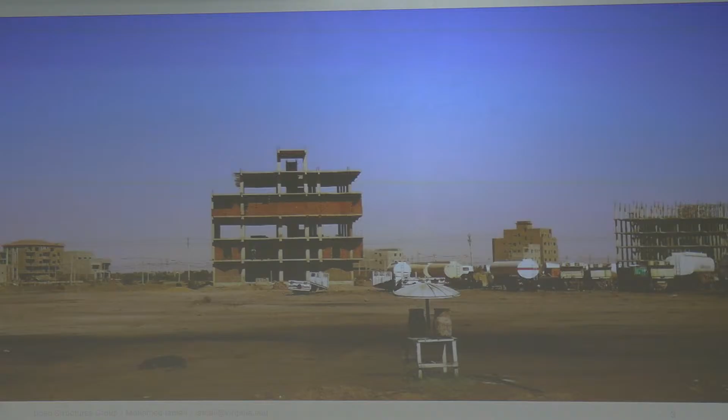And then in the background, you see another common sight, unfinished concrete frame buildings. To me, it always felt a bit like a skeleton of an incomplete dream. These were homes that cost too much for people who were trying to invest in a future, but they couldn't afford it right away. And so they built what they could, and then they waited. And I hope you'll agree that it's not a controversial thing to say that housing should be a human right. And so it always felt a little strange to me to see these unfinished houses just littered around.

And this is not an uncommon sight throughout the global south. If any of you have traveled in Latin America, in South Asia, Southeast Asia, et cetera, you may have seen buildings that looked a lot like this. Most of what I'm going to be presenting today then is motivated by this question: how can we have dignified and accessible construction for the people that need it? How can we have an immediate and profound impact? I want to find ways to translate this rigorous design method that we're developing to issues that affect 99% of the world's population.

A lot of my work started by questioning architecture, and I'm going to use the capital A architecture for all of us and everyone outside of this, and our approach to sustainable development. There's often a really big disconnect between what designers in the global north, places like the United States or Europe, assume designers or construction need in developing countries. We often romanticize indigenous materials, local practices, and we chastise the use of industrial materials like reinforced concrete and steel.

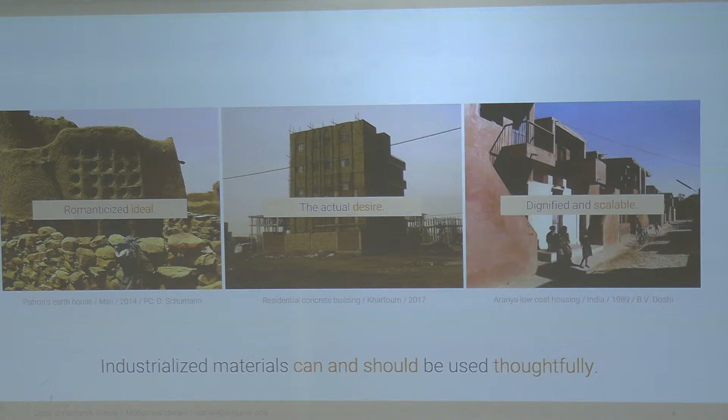But there is clearly a desire for structures that reflect people's desire for a dignified way of living, or something that signifies development, signifies achievement. And to me, that's a big part of why these investments were always made in empty concrete frames. So rather than imposing this romanticized ideal of what low-carbon construction should be in the developing world, I wanted to explore an architecture of dignity that reflected their newer cultural values while still meeting realistic needs for construction.

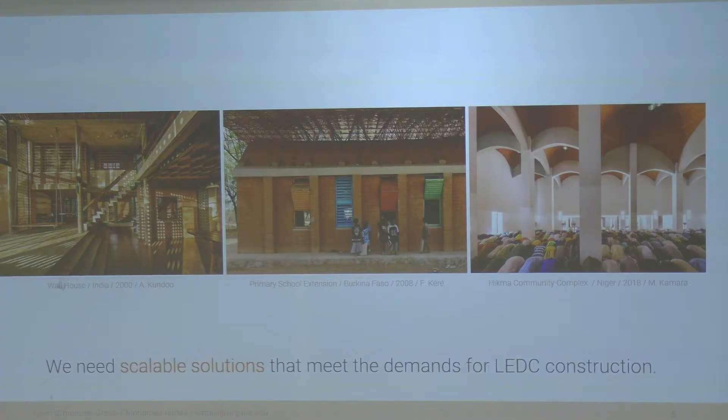I'm not the only person to do this. Some of my favorite designers from developing regions, like Anupama Kundoo, Francis Kéré, Mariam Kamara, have asked these exact same questions for decades. They've combined indigenous materials and practices with industrialized materials, and they've accomplished a whole lot more than we could have a century before. Nonetheless, these are often singular boutique designs. They're really beautiful little architectural gems that you'll see scattered throughout the global south, but they're not necessarily scaling up. They give us a lot to learn from, though, and so I don't want to discount that. But they're unable to meet the needs of so many people around the world, especially when we take in the scale of the challenges for growing populations.

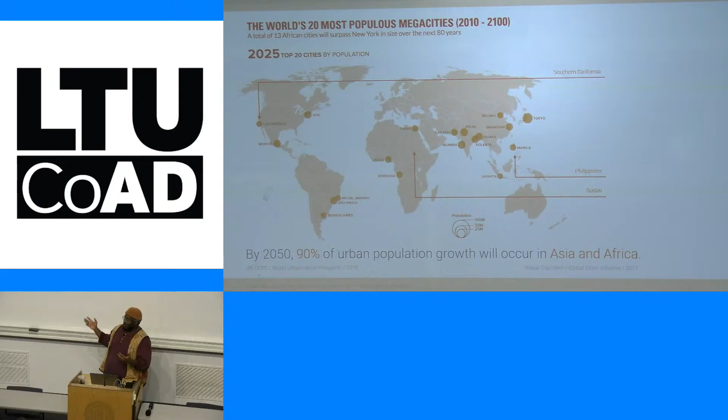And this is both an academic and personal interest of mine. I was born in California, but my family's from Sudan. I was raised in the Philippines. My parents now live in Kenya. All of these places show up on this map at one point or another. So it's not something we could ever really escape from.

So, this is a house. My dad spent 16 years trying to build a house in Khartoum, Sudan. He's an expat. He has, I will say, above average resources for construction, and yet it still took him a decade and a half to build a house for his family. If you don't know, Khartoum, Sudan is currently in the middle of a civil war and has been since the 2019 revolution, roughly.

And so we're not even sure if this house is still standing, but it was a decade and a half of investment to try to build a home for his parents that no longer live. So it's a personal issue because they built a concrete frame building with engineers who didn't quite necessarily know how to work with this material. But he still saw it as a long-term investment that was more secure than the Sudanese dinar.

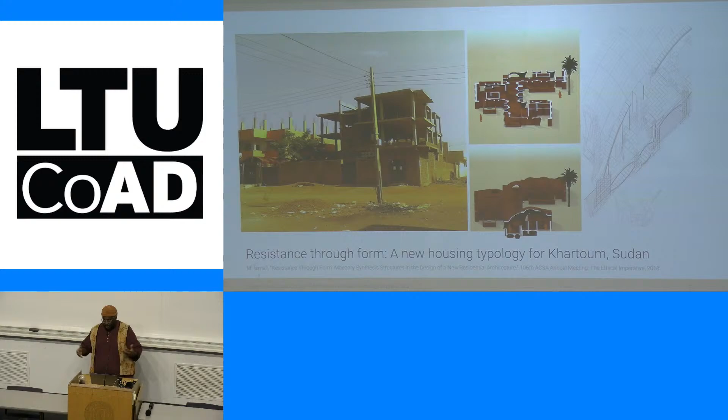So when I was a student, I started trying to figure out how my background in engineering and architecture could combine into some kind of interesting proposal where I could take the local material, not depend so much on imported materials like steel and some of the cementitious materials that were becoming more popular. And so I proposed this vaulted, dynamic system that responded to public and privacy gradients in housing in Sudan.

But if I'm being honest, no one's going to want this. They want the concrete frame building. And so I was still working with this idea that I needed to reinvent the indigenous rather than respond to what was currently desired. This is another photo I took during my research.

And what you might see is a family that has probably been allowed to squat in the property. The reason for this is that they oftentimes were given permission to squat on an unfinished building with the understanding that they'll give their services to protect the building materials. And that, to me, highlights a really interesting issue, especially with our perception of construction practices.

The economics of construction are very different in different regions. That should be obvious, but the point in case is that in a place like the United States, a more economically developed country, labor is the most expensive thing, and so we don't care about wasting material. We care about it from an environmental point of view, but economically we don't. So we will build modular, fast, prefab, wasting materials substantially.

Whereas in a place like Sudan or other less economically developed countries, materials can be more than 80% of construction costs. And so it's incredibly important for them to protect those materials. They guard those for the decade plus that it takes to finish your house. And yet, a lot of the construction looks exactly the same as what we do here.

Flat slabs, prismatic beams, regular column bays, and that's because of a very complicated history of colonization, post-colonization, and building code adoption. Building codes are not developed outside of a context. They are contextual. They depend on who decided to write them. And so they're often inheriting; in Sudan, they inherited the British building code at that time. And so they were building with the same practices there, which assumed that you were building with Portland cement, which is a very specific type of cement based off of England's Portland limestone.

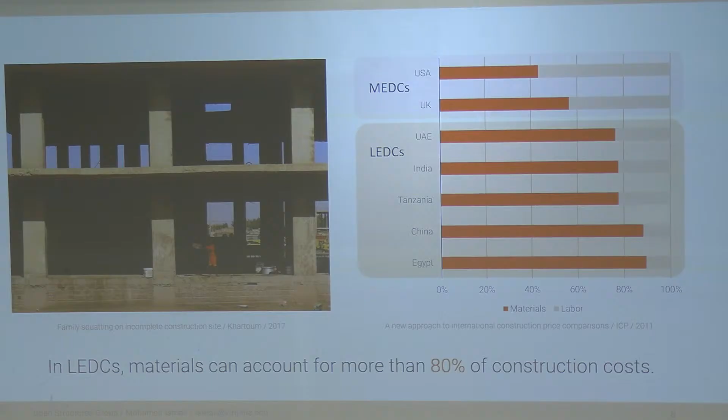So all of this to say, and I could go on and on, but I'm not going to today, it's basically to say all this is inherited practice. And so construction is beyond the means of many people, and to me it never really made a whole lot of sense. I'll also talk a little bit about embodied carbon. I just threw this in really quickly.

Hopefully you all are familiar with the idea of embodied carbon, which is the carbon that's emitted for the materials and the construction, and sometimes the deconstruction, depending on the phases that you're considering in building construction. Right now, on average, 11% of global carbon emissions are just the materials and construction practice. And so it's not the biggest proportion, but the reason it's so important is that it is the immediate emissions that we make.

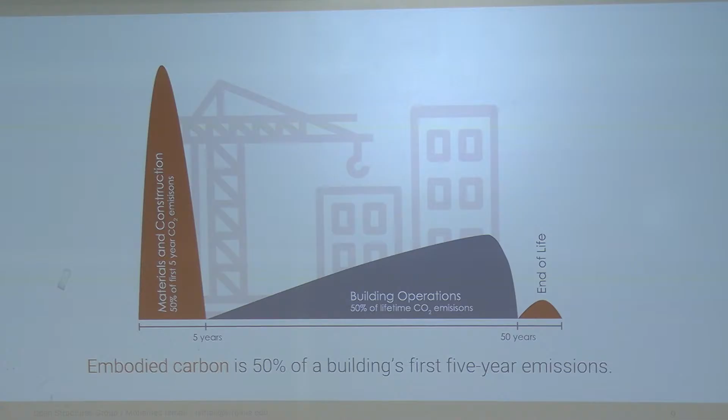So we often talk about lifespan of a building, which might be 50, 60 years if we're lucky. And so we say operation, daylight, lighting, heating, cooling are technically most of our carbon emissions associated with the building. But in the first 5 years of a building going up, 50% of the emissions are most likely just going to be embodied. And so if we're already suffering from a climate crisis, it makes sense for us to focus on the immediate carbon emissions. And so that's where it becomes a big focus.

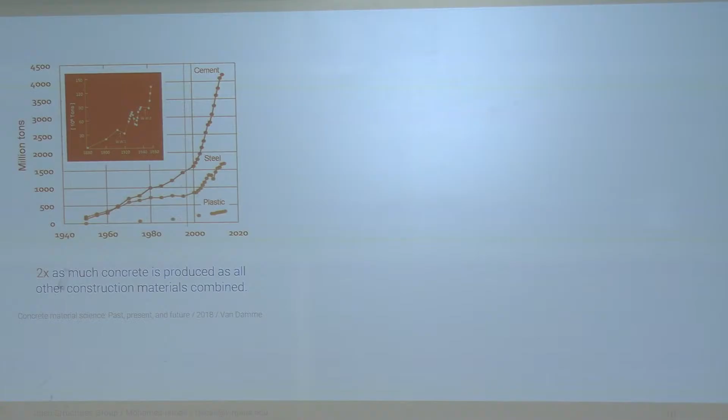Now, I also work a lot in concrete. Concrete has become fairly so a villain in a lot of ways, and I think it's actually more a victim of its own success. Today, if you don't know, 2 times as much concrete is produced as all other industrial construction materials combined. It has far outpaced any other material in the world, and there's a lot of reasons for this. Some of them I highlight here. It's affordable, it's available, it's fire resistant, it's durable, but I think most importantly, it's trusted.

For about 100 years, we have not really changed reinforced concrete construction. It's stayed about the same. If I look at Francois Hennebique's systems from when he first started patenting regular concrete frame buildings, they don't look very different from what we're doing today. And so that might be worth questioning.

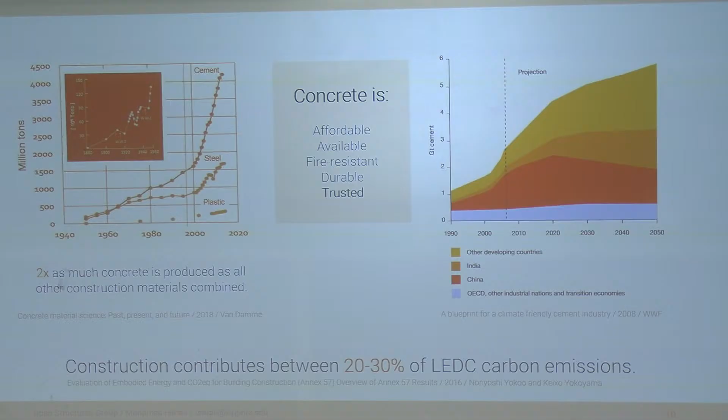Also, this is a projection that by 2050, most of the concrete cement production will outpace that of China. Right now, China is the largest producer and consumer, but places like India, Africa, South America are quickly outpacing China. And so it's expected that the developing world, just in general, will explode due to this urbanization that I talked about earlier on in their use and production of concrete.

So I said 11% of global CO2 emissions are related to building construction and our materials. In less economically developed countries, it's 2 to 3 times that. And so their carbon emissions are much more heavily proportioned towards construction because they're building at a faster rate than us. So it's really important for us to, again, contextualize the numbers and not just say the global average is the global average for everybody. Making sense so far? I'm throwing a lot of numbers, so hopefully I'll bring some photos and images later, but I just want to set the case.

There's also this really interesting misconception that concrete doesn't belong in these regions. These are just a few of my favorite concrete structures in the world. Concrete's played a key role in pre- and post-colonial, less economically developed countries for decades. I think some of the most heroic, creative uses of structural concrete in the world happened outside of the global north or the west.

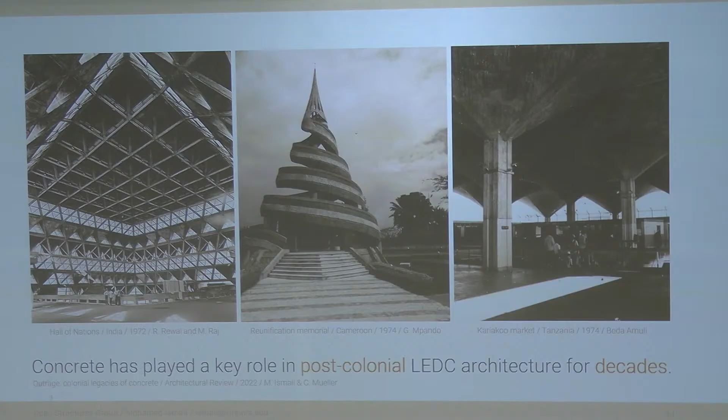This is a reinforced concrete poured-in-place space frame structure that was built in New Delhi, the very first one, the Hall of Nations, by a brilliant engineer, Mahendra Raj, and it's the only one that's ever been done in the world. And the only reason it happened was that labor was so cheap and materials were so expensive that they had to come up with a more creative solution.

Buckminster Fuller visited this project, said that they didn't know what they were doing with the material, and Mahendra Raj laughed at him and said, "We know, you just don't understand our context." He didn't understand that they were carrying buckets of concrete on their head rather than having trucks bring it in. They didn't have factories for steel production. It cost 30% more to import the steel necessary to build a space frame out of steel like Buckminster Fuller would have suggested. So context is everything. And I think there's a lot more to draw from there, but I will move on.

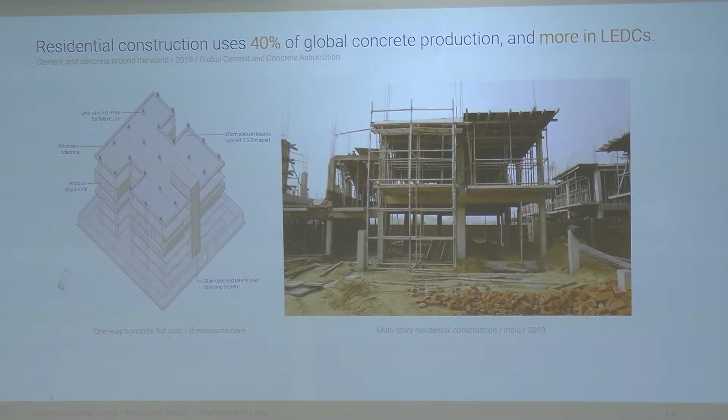Today's construction challenges in my mind lie a lot in what can be done for housing. Residential construction uses about 40% of global concrete production in the world, and it's actually more in LEDCs. It's usually 65 plus. And then when we look specifically at the building system, when we talk about concrete buildings, multi-story concrete frame structures for housing, horizontal spanning systems, which is a fancy phrase for floors and roofs, constitute 50 to 80% of structures, carbon, and mass.

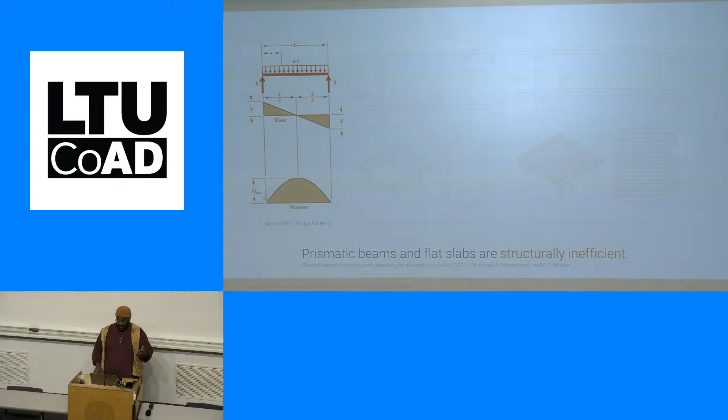Okay, so that was a very long-winded way to explain why I work on concrete floors. I've spent the last 10 years just designing concrete floors, essentially, if you want to whittle it down. But hopefully it makes sense why. Have all of you taken structures at one point or another, or about to, or going to? For those of you that have, I'm really sorry for this slide. This is a beam shear and moment diagram.

I teach structures, so I have to teach this every year, and it's the bane of many students' existences in architecture school. But it's important. Galileo discovered beam theory in like the 1630s. He also wrote about elastic theory. A lot of our structural principles came from some of the earlier Galileo experiments.

And he realized 400 years ago that the stress or the amount of force that every part of a beam is taking is not the same. Yet we design them for the maximum. We always take that maximum moment or that maximum shear, and then we size our structures accordingly. And so if you do this in structures, you'll do the shear and moment diagram for all of your boundary conditions, and then you'll pick that maximum and you'll choose your cross-section size, and you'll say, that's the size I need. But the reality is most of the structure is under-stressed.

And so if we take Galileo's principles and adapt them, we find that we can save some material. We can cut some things off and still be safe and still be within the parameters required for building codes and all of the things that are necessary. We already do this in principle in practice, where we go from flat slabs to CT slabs to waffle slabs like you have in your student center. Those are all variations, but they're still prismatic. They still have the same cross-section all the way across, but they are kind of building off of this idea that the entire structure is not always stressed exactly the same.

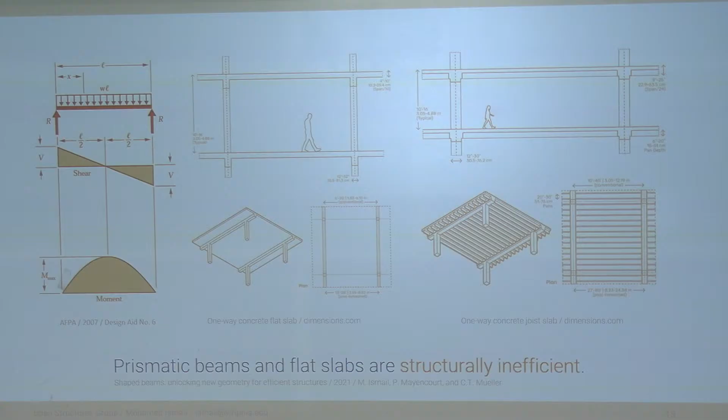And so if we can take that principle a little further, we have this hypothesis. Through geometric complexity, we have more opportunities for material efficiency. And it doesn't necessarily mean I have to go for the most complicated, most efficient structure all the time. This is a really early study we had done where we basically proved there's a gradient of solutions. If I change how complex my structure can get, I can save a little bit more each step. And so if I go from a flat slab to a ribbed slab, there's about a 40% drop off in the mass and embodied energy. And then if I keep going further, I can save up to 70% at some point of just the material consumption of a slab, but it does not have to be the most complicated solution.

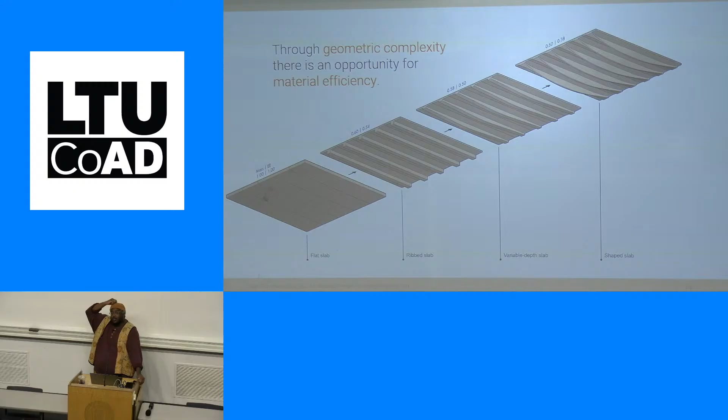And so that turned into this really complicated method of structural optimization where we can take numerical optimization, which is basically you bring in things from computer science where you iteratively improve your solution, you check that solution, and then you keep adjusting until you end up with something that is both safe and efficient. But we don't have tools for all of this. Most architects don't know how to design concrete structures because it's complicated. Even a lot of engineers don't know how to do it. It's a very specialized set.

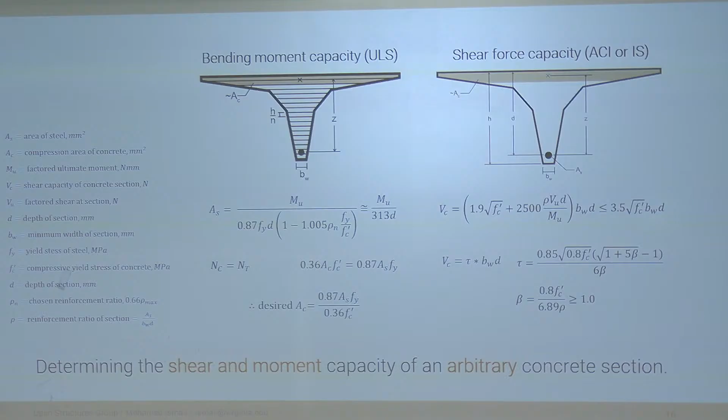And so a lot of my earlier work, especially my doctoral work, was developing tools and methods that most people can hopefully access using just basic mechanics and analysis that a lot of architecture and engineering students would have learned, but may not actually practice in practice. So I just show these formulas to show that I know what I'm talking about. I'm not going to talk about them really. But we determine how much shear, how much bending there is, how much stress there is in each section. We needed to come up with a method where if I just gave you an arbitrary cross-section, could I figure out how much steel there is, where that steel is supposed to be, how much concrete's in compression, and how strong is that entire section? And we need to do that quickly and automatically. And so we brought that in.

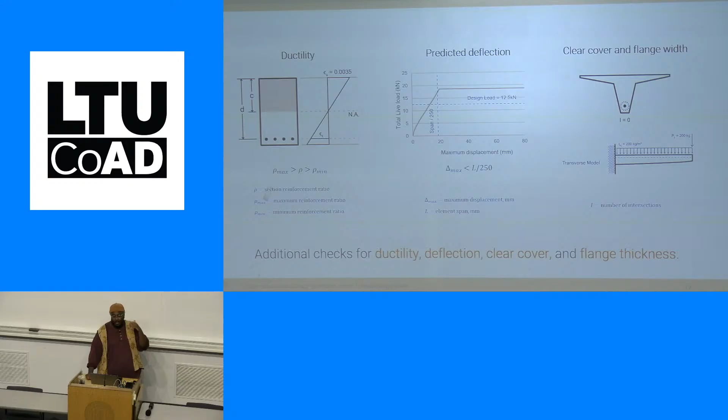Ductility, things like how much steel there is to make sure that the beam doesn't crush before failing, that it has a safe failure. We call it under-reinforced so that the steel is engaged. There's all these principles that are embedded in the sort of philosophy of our building codes, but they don't require us to build an exact rectangular beam all the time. We can accomplish this in any geometry. Deflection. A lot of times people don't realize that engineering is not just designing for structural safety. We also want to make sure that our floors don't bounce so much, or that our wall finishes don't crack, our paint doesn't crack, our paintings don't fall off the wall. And so all of these principles can be embedded in this design method. And so this turns into a constrained optimization problem.

I want to optimize some kind of cost, and that cost could be the cost of materials. It could be the cost of fabrication if we're able to quantify it, the embodied carbon. I have some kind of geometric variable set that controls the shape of an arbitrary geometry, and it's subject to all of the structural and non-structural constraints that I mentioned. And it ends up looking like this. This is a shape slab optimization.

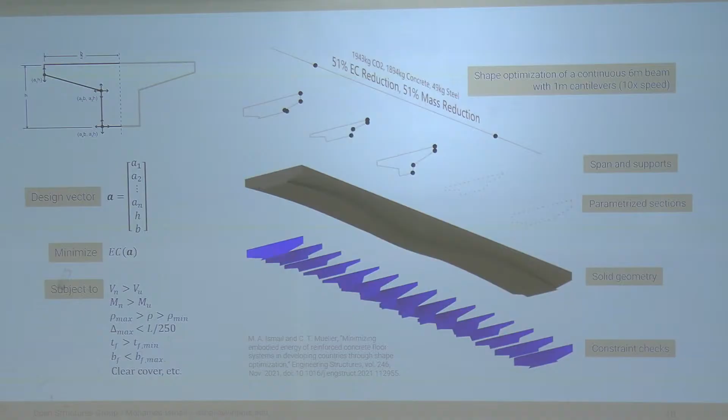It's sped up a little bit, but basically this is what you would see if you were using the tools we developed. We have publications about it. I'm happy to share. The tool is technically open source, but it's very much in beta. And so we're still trying to figure out how to get it in the hands of people, which I'll talk about in a second. But this is the shape optimization for a 6-meter beam. You set up your spans, you set up your variables, and then you let it optimize.

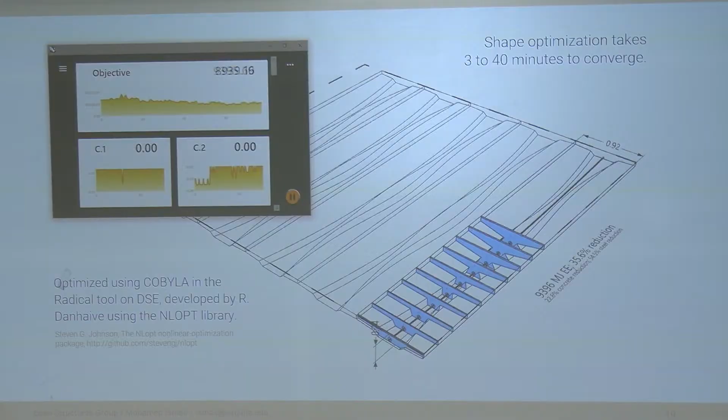And every time a cross-section turns red, that means it's not meeting at least one of the requirements. And until they all turn blue, it's not satisfied. So that's the whole point of constrained optimization. And we can do this for single beams, we can do this for entire structures. This is the tool Radical, which is another plugin that was developed by our research group at the time for constrained optimization in Grasshopper and Rhino. So we wanted to make these tools available to designers who might use CAD and put them in their hands much faster than if you had to require an engineer to be involved.

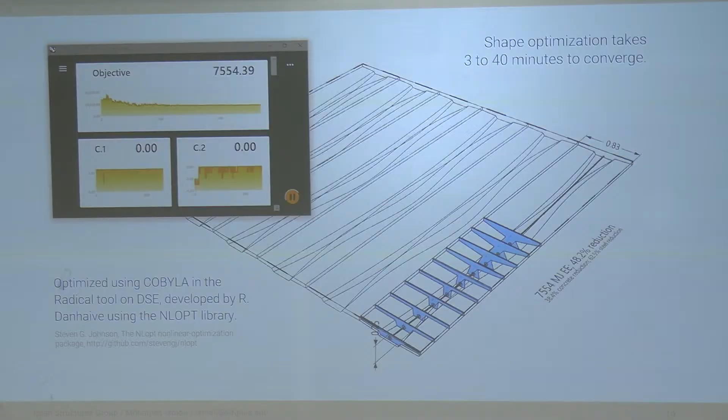This is great. It's strong. It works really well. It gives you solutions that would be really hard. It's basically doing calculations that would take about 10 minutes by hand. You're doing 400 of those every iteration, and then you're doing it 500 times in a row until you end up with the right solution. That's next to impossible for an engineer to do by themselves. An engineer could do this, but it would take months to end up with a design that takes us about 40 minutes. So it's great. It gets us somewhere.

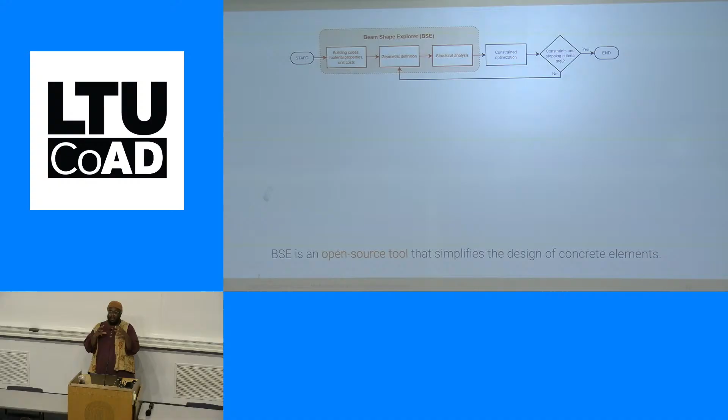And so the hard part is obviously making this available to people. So one of the first things we did is develop an open source tool called Beam Shape Explorer, which essentially captures that complicated part that was missing from that big workflow. And we made some plugins where you can put in the building code that you're working with, the material properties, how strong is your concrete, how strong is your steel, how much does it cost? It does all of the geometric principles, the structural analysis, it puts it all together, and it just kind of fits into tools that already exist for optimization and for structural analysis.

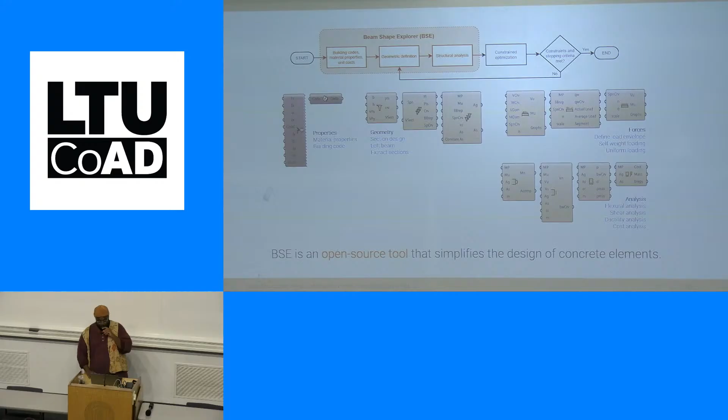So if you've heard of Galapagos, which is a really popular one, or GOAT, these tools already exist. Design Space Exploration is another one that also exists. We're just kind of filling in the hole to get this workflow out there. And we know that this works because we've had colleagues who've used this in their research already. This is some work that was done on robotic 3D printing of self-supporting vault geometries as a formwork for a concrete two-way slab.

And so when you think about it, robotic fabrication kind of frees you up. You can have every single pod of a waffle slab look exactly the same, or you can have every single one of them different. And because of how digital fabrication works, the cost is about the same. And so that frees us up to do some optimization. We can save some material. We can also start to bring in other principles.

I can talk to someone who's an acoustics specialist at Penn State, and he can combine his acoustics with the structural design method. And we've simplified the structure part, so then you can start to bring in other performance metrics that matter. And so this is Jonathan Broyles, who did his PhD on structural acoustic optimization of concrete structures.

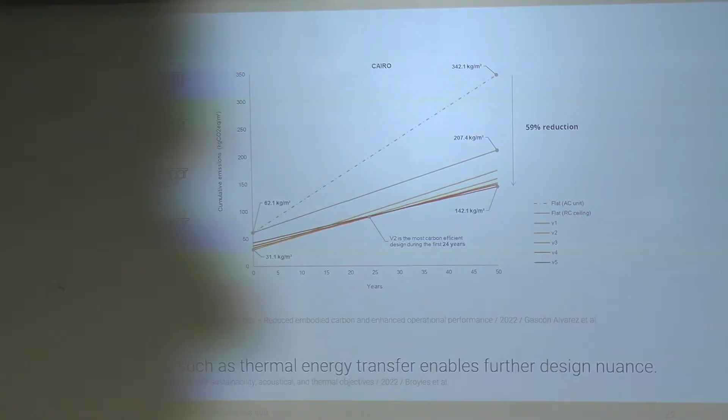Edu Gascon at MIT did his PhD on thermal massing. As you probably know, thermal massing is essentially the storage of heat energy inside of a structure. It can be a really powerful tool for heating and cooling spaces all around the world, therefore reducing our reliance on energy or active systems. The problem is most of us don't understand how thermal mass works. It's a complicated system.

And so Edu has spent his entire PhD trying to figure out how to quantify it and how to actually look at these floor systems as radiators or ways that you can store and heat buildings at different places. And so this is looking at how my initial savings of embodied energy at the very start, or embodied carbon, is that kind of first drop.

But if you were able to quantify this over the 50-year lifespan of a building in Cairo, you could save over 60% of its entire lifespan of carbon emissions. And so that's heating, cooling, and structural. So a lot of different things going on, which is cool because it opens up to a possibility where we're not just designing one structure for every part of a building. We can design it for different programs. We can have more specialized systems if we're kind of projecting this way in the future.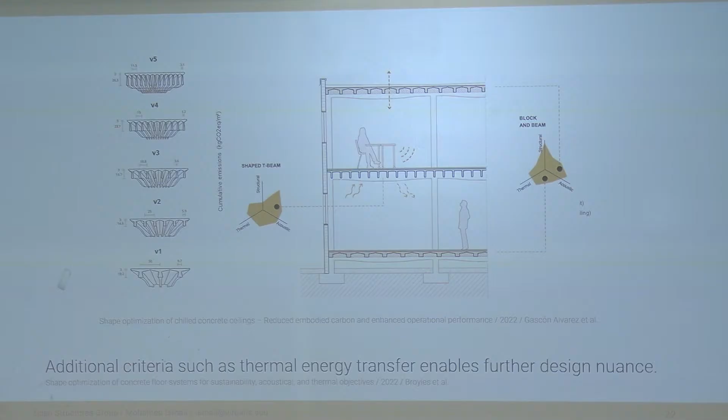Now, I did mention all of this takes 30, 40 minutes, depending on how complicated your problem is. Sometimes it's 5 minutes. That's not realistic if we're trying to design a structure in real time. Most of us are not thinking about our beam designs when we're at the massing scale. But a lot of research has shown that the earlier we think of these solutions, the more potential there is to save carbon later on in the project. And so how do we bring this to the early design stages where I'm still just sketching and trying to figure out where my program goes and where my columns go?

And thankfully, we can borrow a little bit from machine learning and AI. We can use early stage design surrogate modeling, where we just kind of build a set of samples which are based off of general problems. So I could say, I don't necessarily know how much load I have. Load will depend on whether or not this is an office or a library building. And so I can put all that in, feed it into the optimization, generate sample upon sample, map it out, and I get this weird mess of a plot where I don't actually know which solution is best.

This is 2,500 different samples of optimized structures for different live loads, different spans, different depths, different strengths of concrete and steel, all of the variables that I might play with early on. I can't really read this plot. I don't know if you can. I can start to pick out some things, say like the lowest 25% kind of seem to have these characteristics in principle, or the highest 25% does this, but it's still not totally legible.

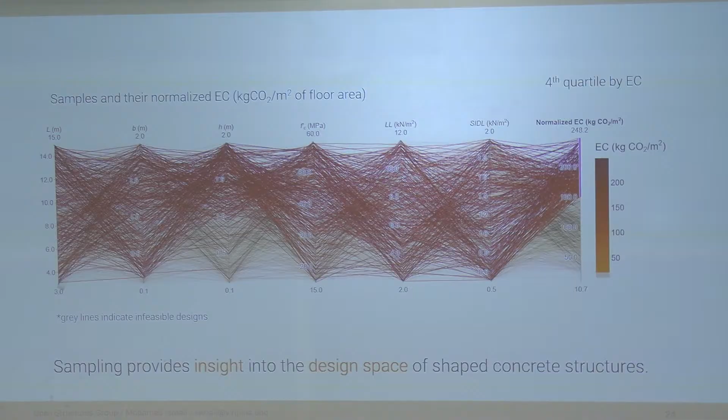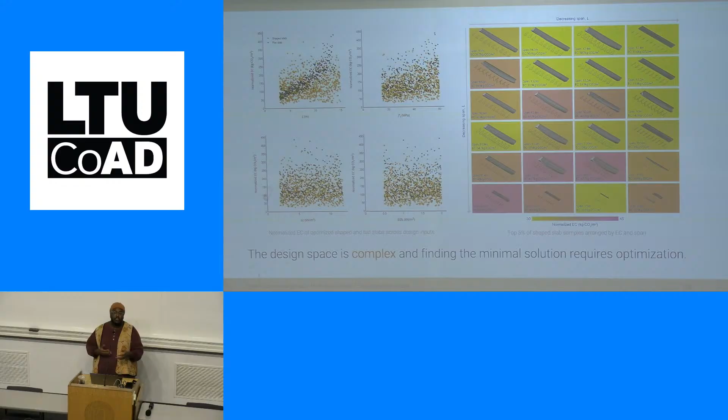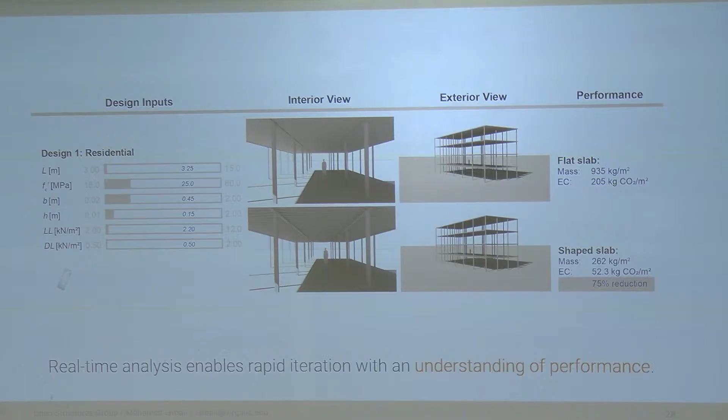So that was a lot of mumbo jumbo about how these numbers kind of come together. Essentially what I'm saying is that in real time, I can play around with some of those number sliders, and I can say, what if this were a house, or what if this were a library? And in real time, it'll tell me how much concrete I'm going to use, how much steel I'm going to use, how much carbon I'm going to be using, what the cost of my materials might be. And I can compare different models. I can do a flat slab versus a shaped slab, and I can show people, as we're just iterating through these designs, how much they might save if they took on this more complicated structural design solution.

And I said real time, so it's worth showing a video of me actually doing this on my little laptop, of using this predictive model. And so this is not running an optimization, it's predicting based off of optimizations. And so I can, with a very generic floor plan, start to figure out how big are my columns going to have to be, or how big are my beams going to be, way earlier than you normally would in the design stages, where you might bring an engineer as a consultant in.

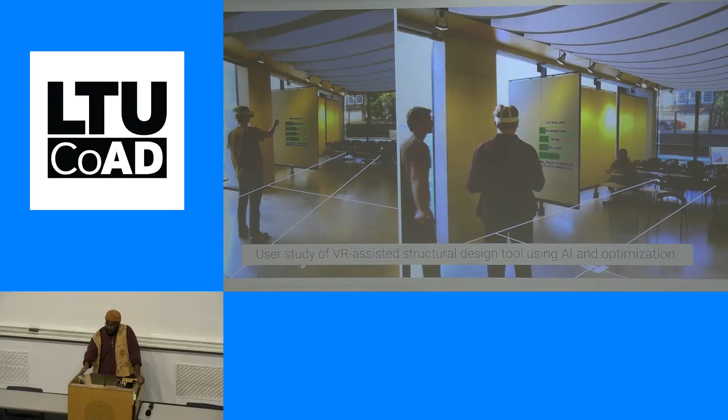To me, what was cool about this is we could start to bring this in with non-experts. So we ran a user study last year with some students using a Meta Quest 3 headset, and they're working with that generic model in a Grasshopper environment using Fologram so that it was projected inside of a part of our building. And so they're seeing the impact of their design choices. They're seeing these shaped structures, and then on that little board, it's telling you how much steel or concrete you might be saving in comparison to the original design.

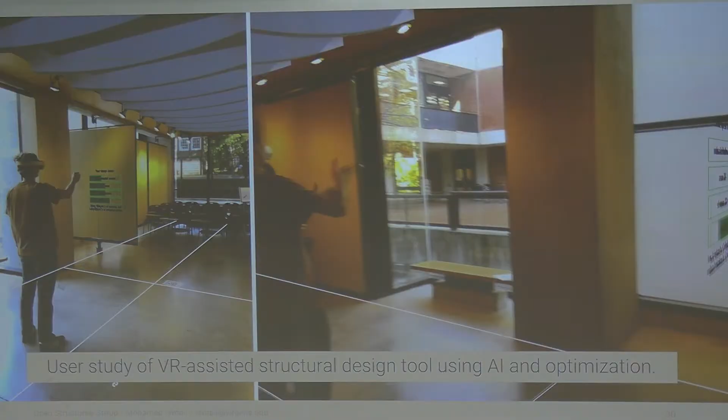And they get to decide, do I care about embodied carbon? Do I care about mass or concrete? Or do I just want to make the coolest, weirdest thing I can? All of that is up to them. Okay, none of this matters if we can't build this. And so a lot of what I'll talk about now is just experiments we've done over a few years to prove that these systems are doable. And we've done this at both small and full-scale prototypes.

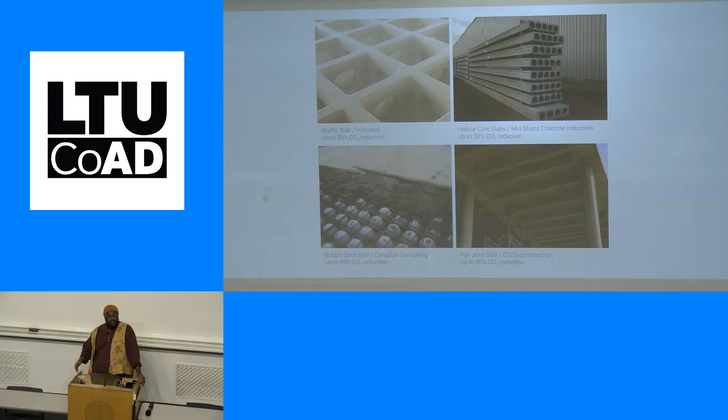And a lot of this is informed by existing practices. So I've already mentioned that we have industrial systems that exist. We have waffle slabs like you have on this campus. We have hollow core slabs. Bubble deck is a newer system. All of these have potential reductions in embodied carbon. The reason these haven't been adopted at the scale that we would want to see for these solutions is that they often require a huge amount of capital investment.

You have to build factories. You have to build the facilities. You need the infrastructure for it. And so a lot of developing countries don't have that already in place. There's investment opportunities and people trying to make this happen, but they haven't quite scaled up the same way. Precast concrete in the United States has existed for decades, but it's still not a majority of our concrete construction. Only about 15% of concrete construction is precast. And so we're under an illusion if we say these are the immediate solutions.

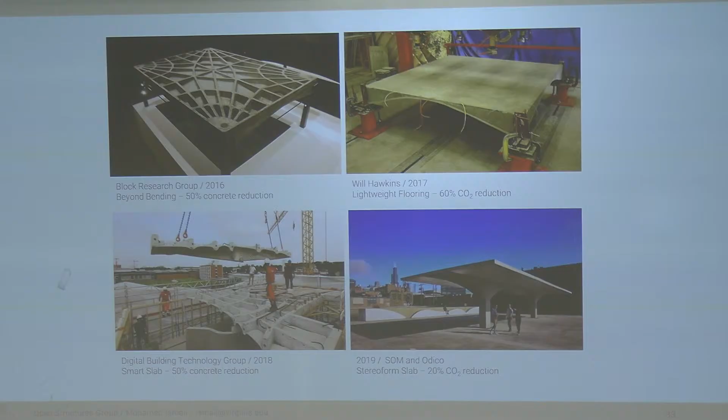In academic research, there's been a lot of really exciting work done by colleagues where they've found ways to use digital fabrication, ultra-high performance concrete, robotic fabrication, to build really creative and inspiring solutions, but they often are requiring fabrication methods and materials that are either not available or not in code or too expensive. Ultra-high performance concrete is about 300 times the cost of regular concrete. And so it is an amazing material, and you could potentially save a lot of material.

Also, 300 times might be wrong. I think that's an outdated number, so don't quote me on that. But it is more expensive than standard concrete. It's becoming more accessible, but it's still not quite there. And so what we've been really interested in are accessible ways of designing and fabricating these things.

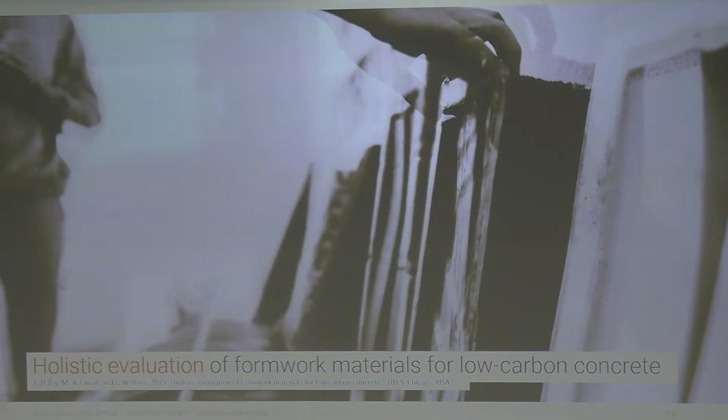A really simple study that we did at UVA last year was trying to just look at the materials that we use in our studios. A lot of students have been advocating for the removal of XPS, extruded polystyrene foam, because it can off-gas carcinogens when you're cutting it on a wire cutter. Certain students have been worried about the material just being in their studios in general. And one of the issues that frequently comes up is that we don't really have a great alternative for casting. We don't have a great material that we can cut, that's cheap, that's accessible, that we can cast whatever we want, our massing model, our final model, whatever, out of it.

And so this was a great chance to bring in some of the research we had already been doing and just say, okay, what are some of the materials that are available or materials that we're interested in? What are things that we assume are going to be low cost, low carbon in comparison to XPS, and let's actually test them and quantify some of these assumptions. And so we started this by just mapping out where our materials came from.

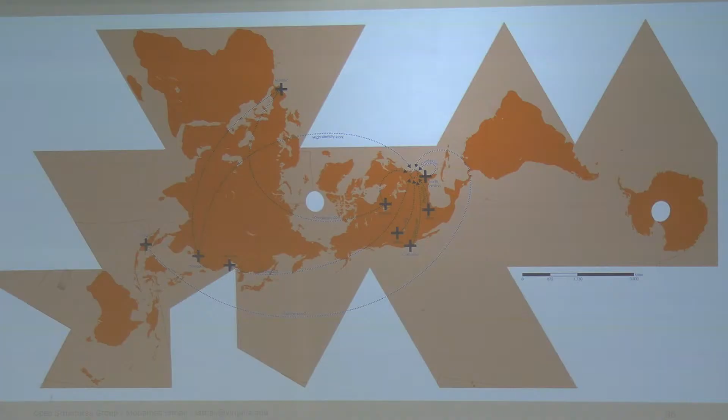Turns out our extruded polystyrene, a lot of it's actually coming from inside the United States. Almost every other material we're considering comes from around the world. And so they might be low carbon from a material sense, but their transportation is actually a huge issue. Doesn't mean that they're not equal, it's just worth considering where they come from and being honest about that reality. And so we looked at materials like cardboard, cork, reeds, which often are imported from places like Indonesia, bamboo, which we actually found in Charlottesville at a local Japanese garden.

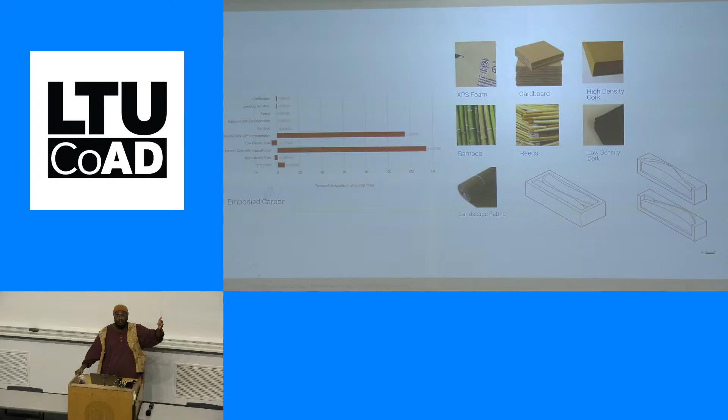Landscaping fabric is another way that you can build complicated forms, and we started to actually quantify what is our embodied carbon. So you'll see that certain low density, it's really small, I apologize, cork, technically, you can argue that it's a negative embodied carbon material because it's a natural material that draws carbon from the environment. But because most of the cork is produced in Portugal and then processed in either China or Canada and then brought to us, there's a huge carbon footprint that comes with it. This small bar at the bottom is XPS. That's the original polystyrene foam that we're dealing with.

Then we look at the cost of the material. How much does it actually cost to use it? Cork, which was the one that my students were most excited to experiment with, was the most expensive one. It's a beautiful material. It actually gave us a great finish. Things like cardboard, landscape fabric, which were super cheap, low carbon, tended to be really hard to work with. So this is labor in hours, just how much time our students were working with these materials.

And so the whole point of this, the conclusion of it basically was that there is never a clear argument between which material you should choose for whatever. It's the same thing between mass timber and concrete. If you don't have the supplies of mass timber, then concrete makes sense, and vice versa. And so it's important for us to be honest about these reflections.

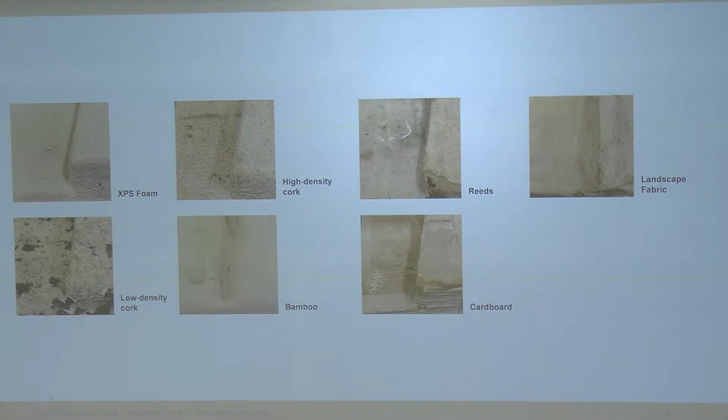And so we presented this work at the school to just kind of showcase what can be done with what is readily available here, things that you might order from Amazon or Walmart or get down the street at the local art store. And we tried to just give an honest reflection of what's done. We also documented and published some findings on this over the summer on the finishes that you might end up with and what tools you might use. Are you using a CNC router or using a laser cutter? All of that factored into how accessible these were.

Then on top of the smaller scale, lab scale work we've been doing, we've been lucky to work with a lot of really great partners around the world for full scale fabrication. So this was a 5-meter prototype, so about 15 feet, that we did in New Delhi in India a couple years back. And we designed a system that met India's code and used 50% less material, but ultimately it was built using all the exact same concrete and steel that is available to builders there.

And this was a great humbling moment where I was asked to challenge my assumptions. I thought that I could get foam for an initial prototype at the scale that we wanted. Due to land pollution issues in New Delhi, we could not find foam. Nobody can sell foam at the scale that we needed. And so that meant that we couldn't use a CNC router to route this complicated 3-dimensional structure with 2-way curvature. That would be really hard to build by hand.

So our local partners offered to do it out of 3-inch steel blocks and basically mill the steel blocks until we got the shape we wanted, which is insane if you think about it. I mean, it was great because they wanted to make our dreams come true, but that was not the right way to do it. And so we just had a conversation with them and we found out that they had 20 years of experience working with plate steel.

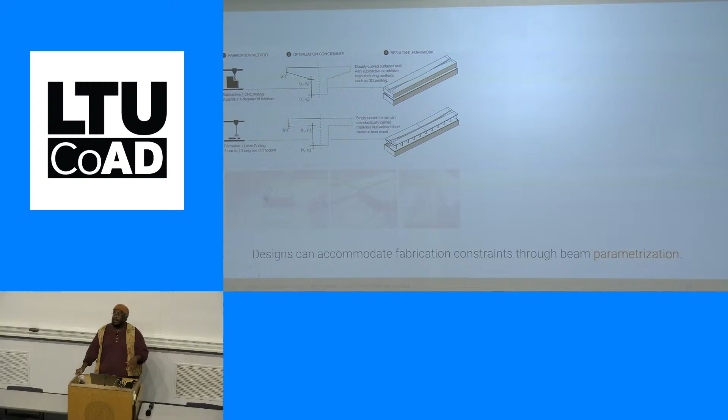Plate steel for formwork is a really common material for especially affordable construction because you can use it up to 200 times plus if you oil it and take good care of it. And so it's an expensive initial thing, but if you have the skill and labor for it, they can build a formwork like this. It was a formwork that kind of came apart in 4 pieces. We did not tell them how to design the formwork, they did it themselves.

And I forgot to mention that the partners we were working with was a local nonprofit that specifically works on affordable housing in rural areas of India. And so they had a lot of practice working with what they called small and medium scale enterprises. Unlike in the US where we might have big precast companies that can transport things 100 miles, in India you're usually working with a family that's in a close neighborhood and they sell the block product to people in that area.

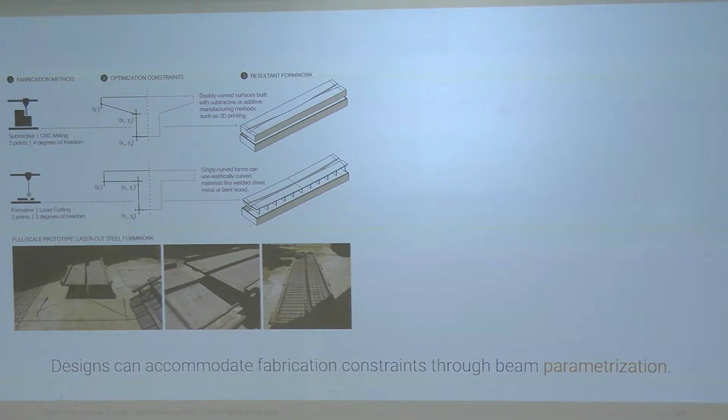So anytime someone wants to build a house or an extension or another room, they're buying it from their neighbor and building. And so they had skill and knowledge at working at that scale. And they believed that this was the right way to do it.

We also got to test it at the National Cement Lab in New Delhi, or Faridabad, right outside of New Delhi, and proved to the engineers who were very skeptical when they saw the structure that it met the code requirements. It wasn't too flexible, and it was strong enough to meet all the requirements for residential loading.

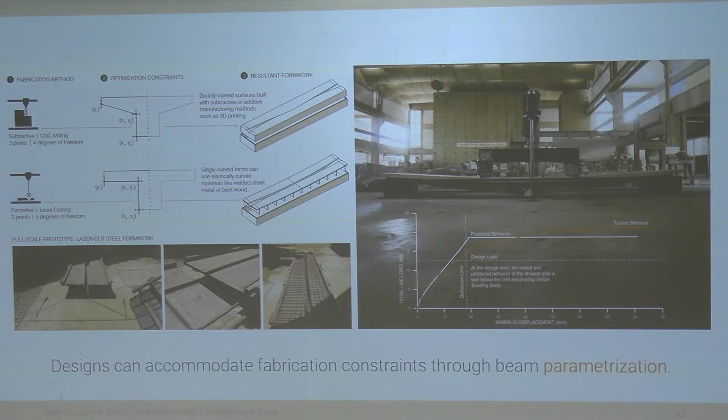So the white line is the predicted load that we had done on our computer through analysis, and then the orange is their actual behavior. And so we often end up doing structural testing because until you actually test this in front of people, people are not totally convinced that it works.

This turned into another collaboration with some amazing professors and students at the University of Arkansas. We built another prototype in Arkansas. One of the things we found in India was that even though you can design and build the coolest 3-dimensional form, the actual translation to fabrication is always the issue.

There's a sort of misconception that digital fabrication is a high-tech thing that's inaccessible to most of the people in the world. The fact of the matter is if I look hard enough in New Delhi, I will find somebody with a 3D printer. I will find somebody with a robot arm or a plasma cutter. But we still have to figure out how to translate the design from 3D to 2D pieces.

And so this was a really great excuse to work with some partners of mine, Edmund Harris and Emily Baker at Arkansas. One was a math professor and one was an architecture professor, and they had already been developing something they called ZipForm, which is a way to mathematically translate 3-dimensional curved surfaces into 2-dimensional flat objects. This was a specialty of Edmund, and Emily does a lot of fabrication.

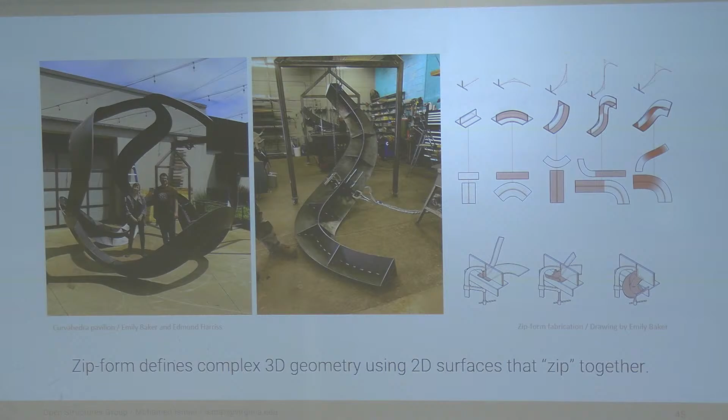And what was cool about this was that it just required a very simple jig that Emily had constructed with students who had never worked with metal before. Whoops. Let's see if this works.

Yeah, okay. So the jig is basically pressing these 2 flat pieces of steel together, and then you're just spot welding as you go. So it's a really fast fabrication method. And what's cool about it is that it removes all the guesswork.

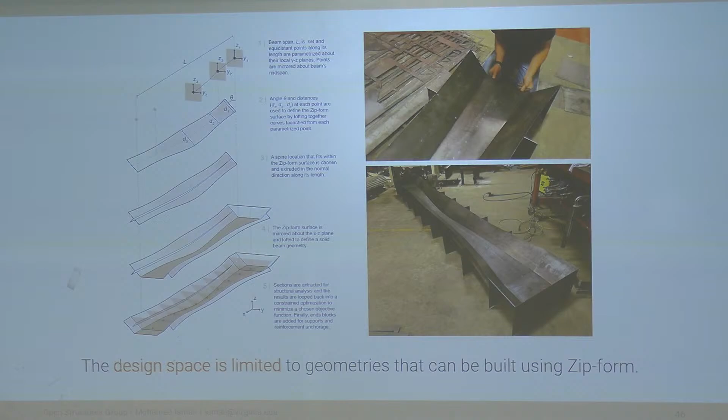So if we could bring the design method of ZipForm and put it into our constrained optimization method that I talked about earlier on, you basically end up with formwork that can just fit together like a bunch of puzzle pieces. And so it was relatively easy to assemble the whole thing. And so we ended up with a formwork that was more reliable.

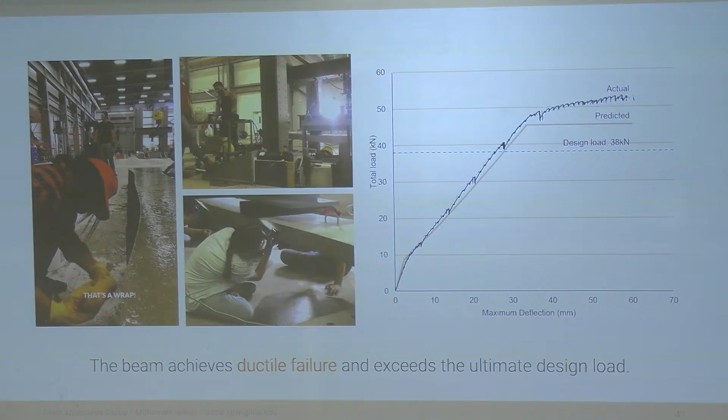Does that make sense? All right, cool. Just checking that you're all awake still.

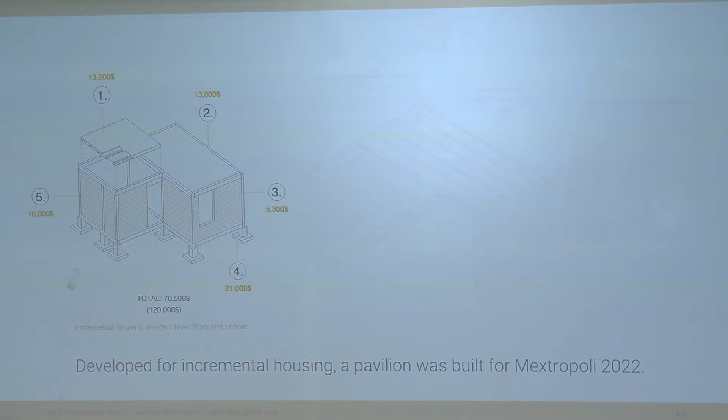Okay, this is one of my favorite prototypes in Mexico City in 2022. We got to build an actual almost room scale example of a shape optimized structure, again, saving 50% of the mass. And this was cool because it started as a conversation during the pandemic with these affordable housing builders in Mexico City who were using something called incremental housing, which is a long-standing policy.

It's basically the cheapest way to give housing to as many people as possible, where you build just the core unit, which is usually kitchen, bathroom, 1 bedroom, and then you provide it to the family, and you kind of guide their construction in the future if they're able to afford it. And so we took the most expensive part, which, as I mentioned before, was the floor system.

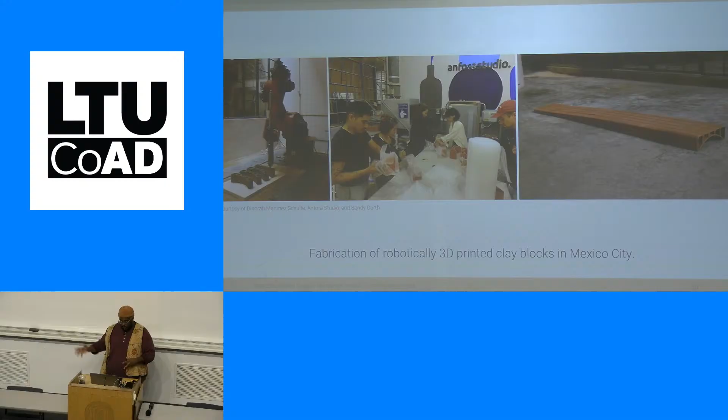So if you had a 3-floor building, that might be the most expensive portion, and we showed that you could optimize this system. And this was a good example of what I was talking about. We originally didn't plan on 3D printing clay for this, but we happened to find a great collaborator who had already opened a 3D printing studio in Mexico City and wanted to try this out.

And so what that meant was that original argument that the more complexity we have access to, the more we can save. We were able to prove that if you had a 3D printing arm, you could shape every single block completely differently for the same cost as designing all of them exactly the same. And so we ended up with this sort of tapering solution, but the widths of the beam stay the same.

And I forgot to mention, block and beam is a long-standing system that's been used since about the 80s in Mexico. It exists in other countries. And the reason it's really popular is it's a great way to build larger structures with very small pieces. And so you have these prefab segmented little beams that you can buy at a local shop, and then you have the blocks that span between them.

The blocks are just there to hold the weight of the concrete while it's curing, and then once the concrete cures, those blocks are essentially lost formwork. So they aren't necessary for anything after they're done. But it's a long-standing tradition, so people are very familiar with how block and beam systems look.

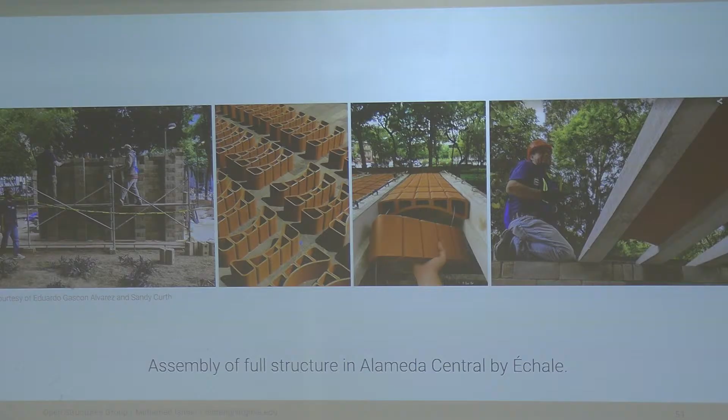And so we got to build a prototype in the middle of Alameda Central. Échale was our local contractors who had a lot of experience building this. And we didn't actually get to structurally load test this the way we wanted to, but a couple thousand people visited it. This young lady did some lateral testing for us. It did technically survive 2 earthquakes, but the epicenter was far away enough that I don't brag about that. But they were like magnitude 5 and 6 earthquakes.

And so it was cool to be able to brag that our structure, which was not actually finished, we didn't glue anything down, there was no foundation, but we did design it so that there was no overturning moment. There were all these things that we put in place that I'm really grateful that we did, because it could have fallen during that week that it was up. And it garnered interest from people who saw the system as something that resembled their housing. It was just a slightly different version. It didn't look too alien.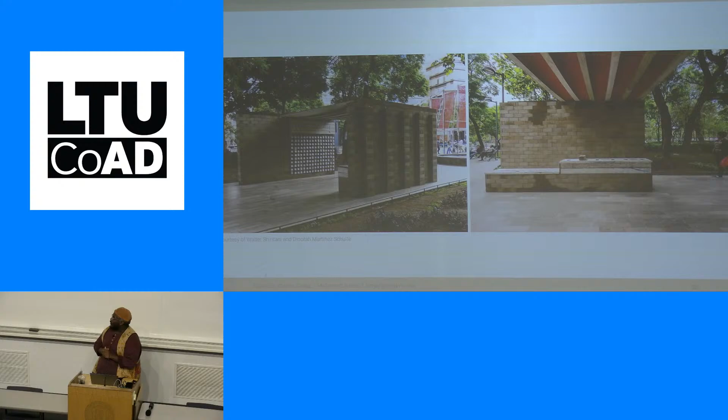So we had post-tension walls and calculated the overturning moment. So what you see inside there is a little exhibition piece where people could come and put little postcards for their dreams of the future of housing in Mexico City, or the future of Mexico City. And so it was part of a larger collaborative effort, but it was great to see it in person.

Now we're working on a similar prototype in Nairobi, Kenya. Nairobi is one of the fastest growing cities in the world. It's growing at a rate of about 22 people per hour, which is a little hard to think about. Nonetheless, it's facing a housing deficit of over 2 million units. Over 70% of their population live in informal settlements, in massive informal settlements like this. It doesn't mean that they don't have housing, it just means that they don't own their land, they don't have the infrastructure, so they often are self-organizing.

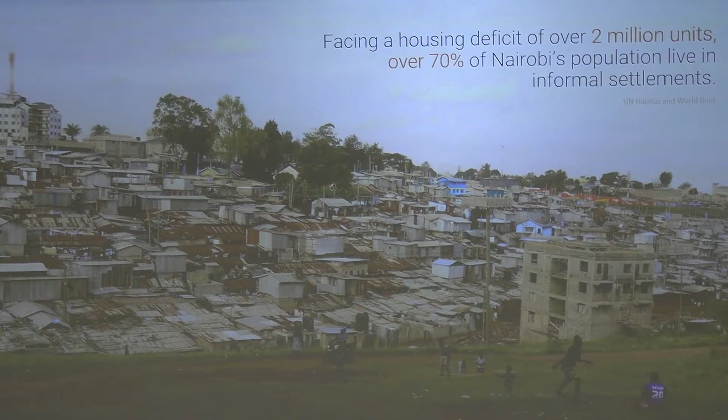Kenya is also one of the more aggressive countries in terms of climate policy. I hope you'll agree when I say that Kenya is not responsible for most of the climate change, but they're already suffering a 3 to 5% loss in their annual GDP just due to droughts, due to flooding, climate migration. They're having a huge amount of issues, so they're being more aggressive about this. They're being more forward-thinking than certain countries like ours.

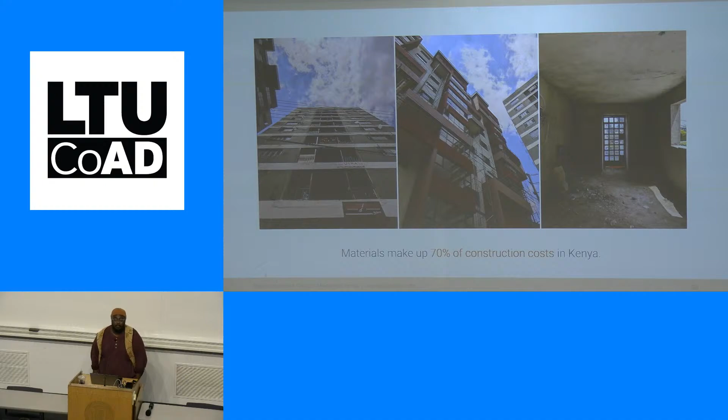And so just like a lot of the other countries I've worked in, materials make up about 70% of construction costs. And so developers have actually reached out to us and asked how we could use some of our research to work there. So we're hoping soon to build a prototype yoga pavilion with this locally owned family business that actually does regular yoga classes in the middle of this beautiful forest in Nairobi. And we want to use it as a way to show that one system, namely the zip form system, can be used to design formwork for many different types of beams.

And so it'll be a simply supported beam, a cantilever beam, a double cantilever, just showing that different boundary conditions can be built using the same formwork system. And we're doing this with a local steel fabricator named Framework, who already have a lot of experience working on modular construction and modular formwork.

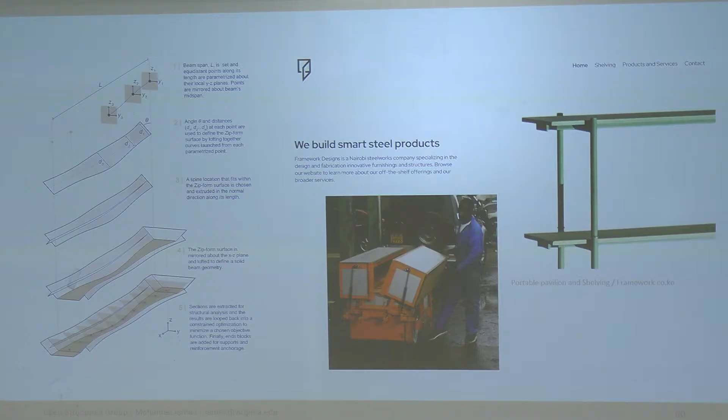This was a video they sent me about 2 weeks ago of their first prototype of a beam that I just sent them a Rhino file, and they were able to make the zip form themselves pretty much without instruction, which was great to see. And so hopefully in the future we'll build this.

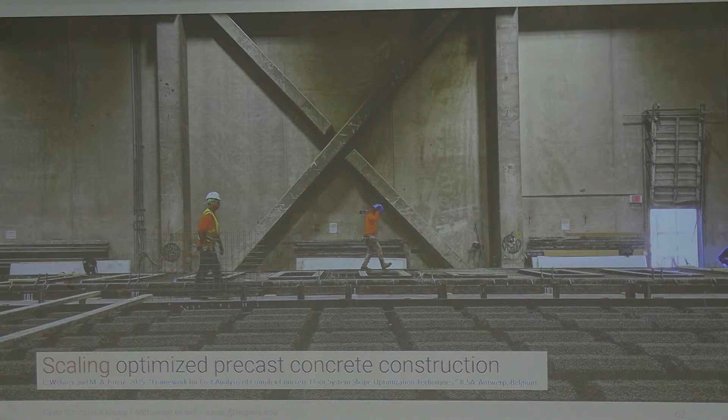We've also been in discussion with precast concrete construction companies in the US to work through the obstacles to adoption. As I already mentioned, the economics are different for construction. And so a lot of times people see these systems in the US and they say, that's great, but we don't have time or capacity to do anything that would slow down production on precast, which already has incredibly slim margins and is already struggling to keep business the way it is.

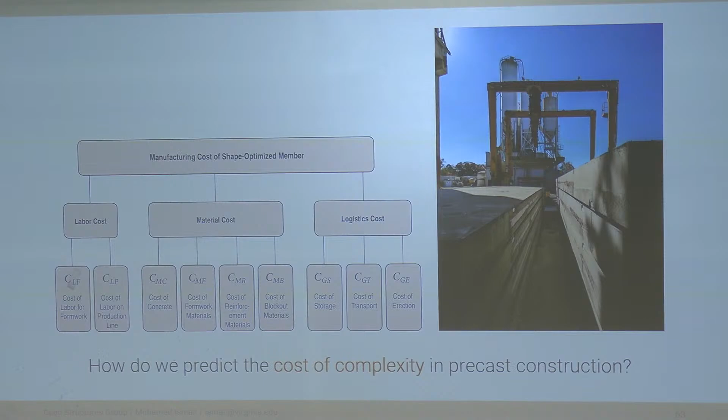And so we recently published a very small paper just kind of questioning the costs of precast construction. And the answer is that it's really complicated. It's labor, it's materials, but almost more than anything else, it's logistics. If your concrete takes a little too long to cure or cures too quickly, that throws off the mechanics of everything else. And so we're working on actually documenting through lit reviews of structural design, detailing, fabrication, transportation, material sourcing, and much more.

And we're seeing what kind of shape optimization research has already answered and what are the gaps that are missing. So we're not really saying that we have all the answers, and this is just a really boring table, but basically the things in purple mean that there's a gap. There's something that we need to question further.

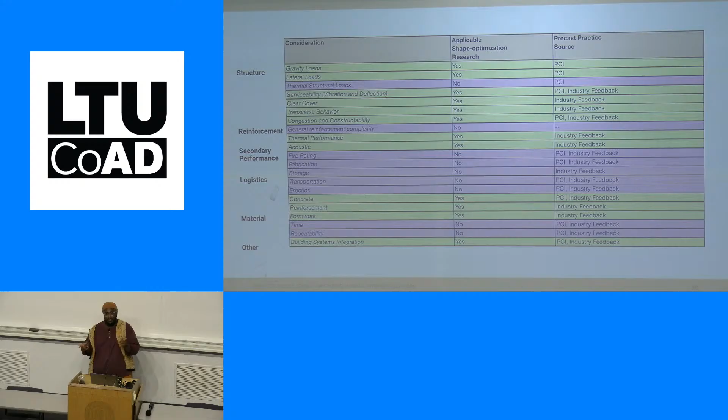And then we have spoken with people in the industry and asked, what manuals do you have, what resources do you have, and how do they overlap with academic research? So we're really hoping this opens the doors to a larger conversation where we can take this optimization method and these tool sets that we've developed and actually put cost into it, a realistic cost metric, because until we do that, nobody really cares.

I'm going to end on this last thing, which is that outside of academia, I'm really lucky to be working with colleagues who are either at MIT or just left MIT to take what we've learned and make innovations accessible to people at a global scale. So we launched a company named Forma about a year ago, and we've been building and testing our ideas at full scale together for about 5 years, but now we're actually trying to bring this to practice.

So our team consists of these three brilliant recent PhD graduates, and then I'm one of the scientific advisors along with Caitlin Mueller and Les Norford at MIT. And we're developing pilot projects with local manufacturing companies in the New England area to validate what we think is possible in terms of cost savings. So this is the first time where after 8-9 years of trying to get companies to actually help us figure out the market, we just decided to do it ourselves.

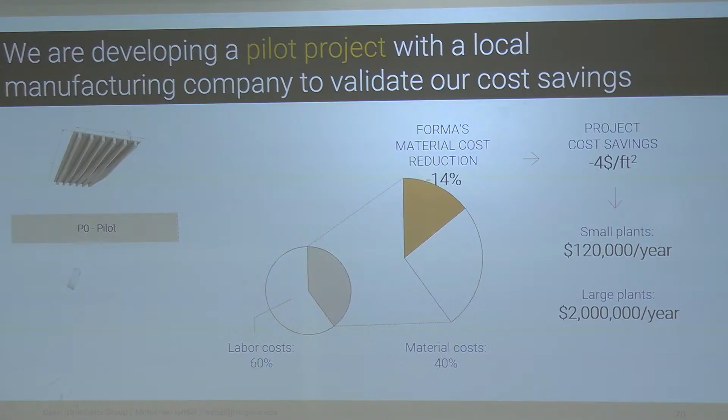And so we're doing the market research, we're investing the time and energy to figure out, okay, how much does it cost for a small plant to try a different design? How much does it cost for them to actually change one of their beds in a precast plant and save some material, even if it changes some of the complexity down the line?

So some of what we've managed to accomplish is that Mexico project I talked about actually turned into our first customer, where Ladrillera is a company that produces affordable housing block and beam systems in northern Mexico, and we've been working with them since 2024. We've also recently won the MIT Climate and Energy Prize and the Massachusetts Clean Energy Center's Innovate Mass grant. So these are all recent developments, but it's to me a signal that the industry is interested and that they're actually trying to invest in this. And so hopefully we'll be a part of changing this.

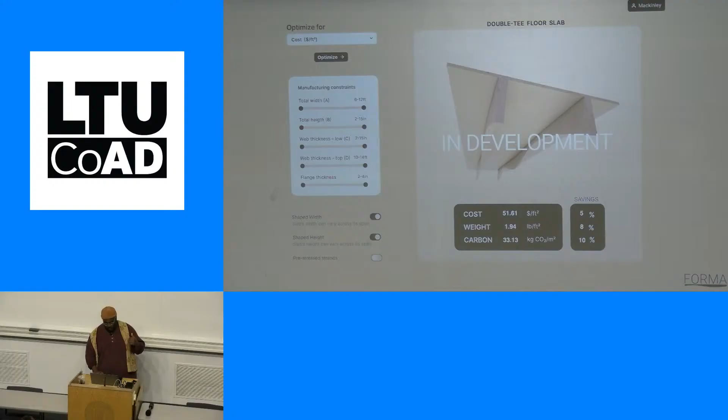One of the first things that we're working on, and this is just a sort of draft video and development of a tool that takes all of the concerns that a precast company might have and puts them into a tool that uses that predictive modeling I talked about earlier on to show you that if you were to change this dimension, or give yourself a little bit more complexity in this regard, how much you might be able to save, and can you justify that?

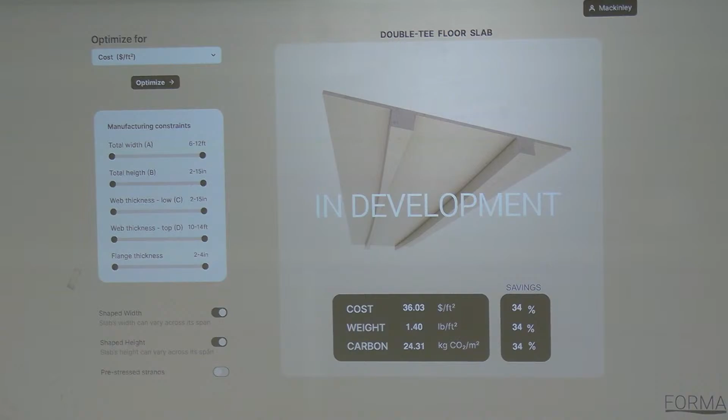And we're trying to make this as simple as possible. We're removing the CAD environment. We're making this a web tool that people can just iterate with. And this is early stage design, where a company that might be building a parking garage might find that they can save 30–40% of their concrete if they just modify like one dimension a little bit. And we're starting to gain some traction there.

As I mentioned, this was our very first work, which was working with this company, and this is Edu Gascon, who was interviewed for local news talking about this design that we had done, which was basically just a 16% saving. So it's not a huge number, but it doubled their profit margin because their profit margin was already slim. And so they saw this as an obvious yes. They've already started producing this. Hopefully we'll start selling it very soon.

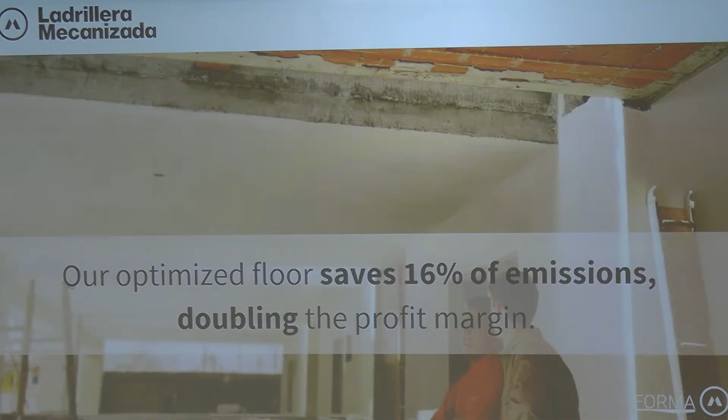And what's cool is that these companies don't work in isolation. When one company kind of builds up a system and proves that it can be competitive and meets all the local codes and is more affordable, other companies start to take a hint. And so we're excited to see where this goes.